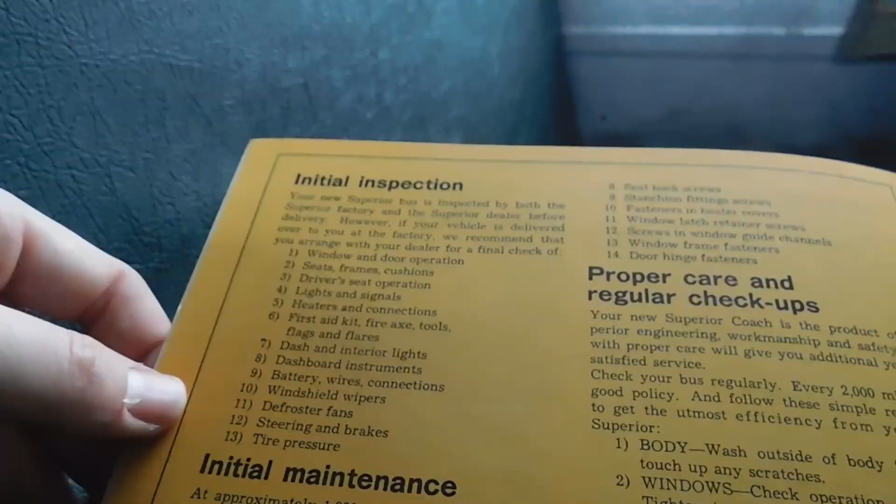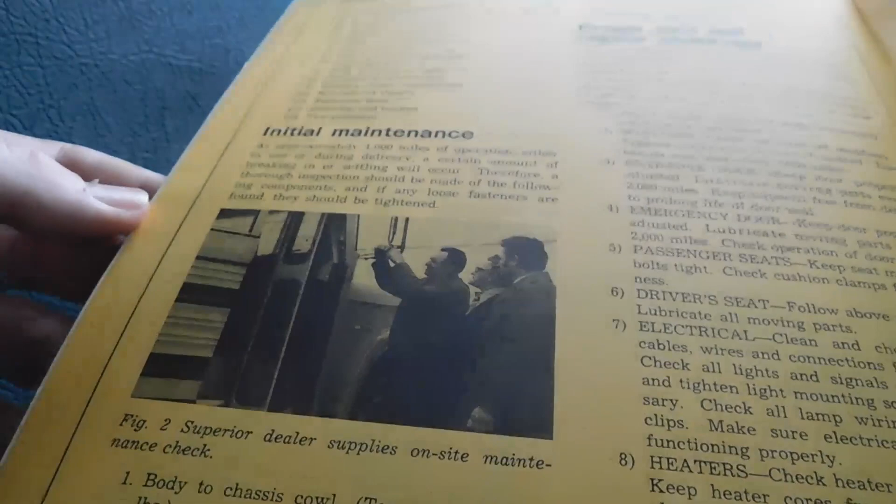So next we've got initial inspection, which would pretty much be your delivery inspection, I guess, and initial maintenance. You got a picture here of the outside of a Superior. The description for that photo is Superior dealer supplies on-site maintenance check. So you got your list on what to check when the bus is delivered. Proper care and regular checkups.

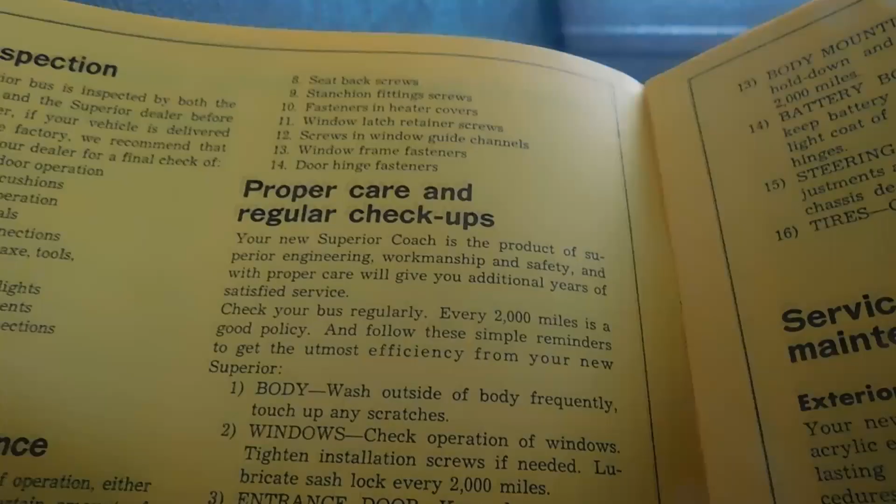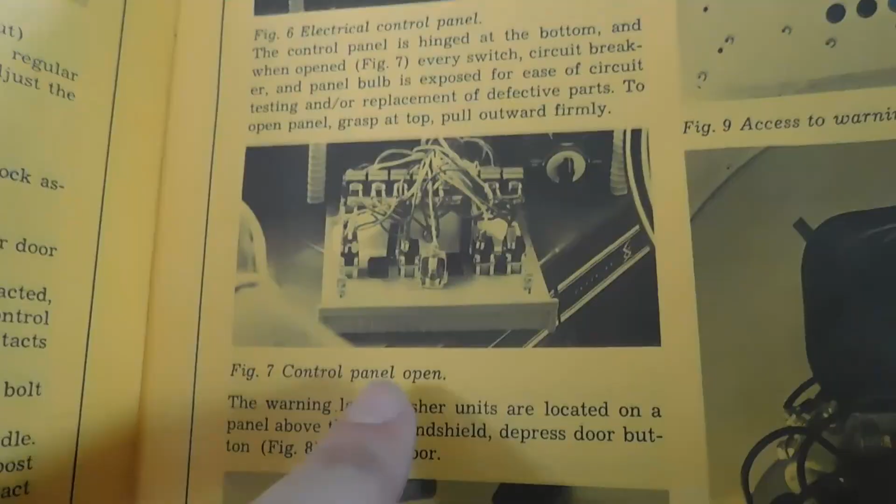Electrical system, you got a picture of the switch panel, and you've got your access to the warning lamp controls right up at the top. There's your switch panel tilted down to access all of the wiring and stuff that's behind it. And then in this picture it shows you where you can open that little door by pushing a button. Warning lamp controls and wiring seem to be behind that door after you push that button.

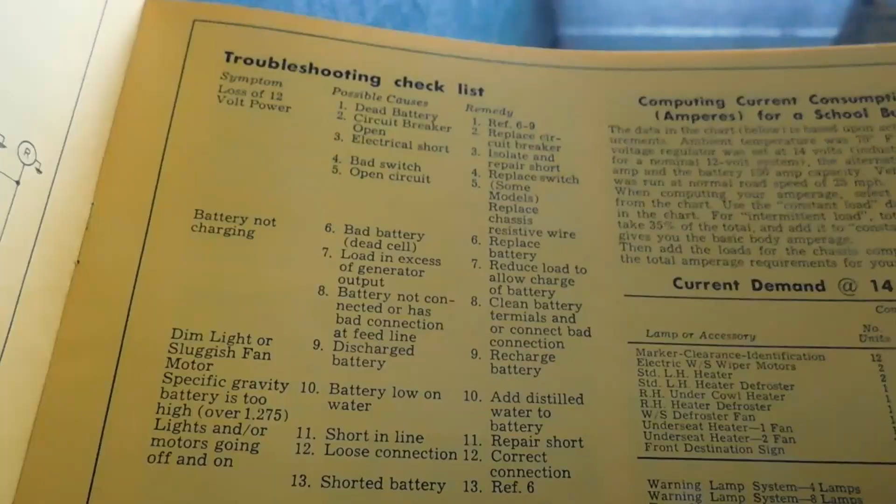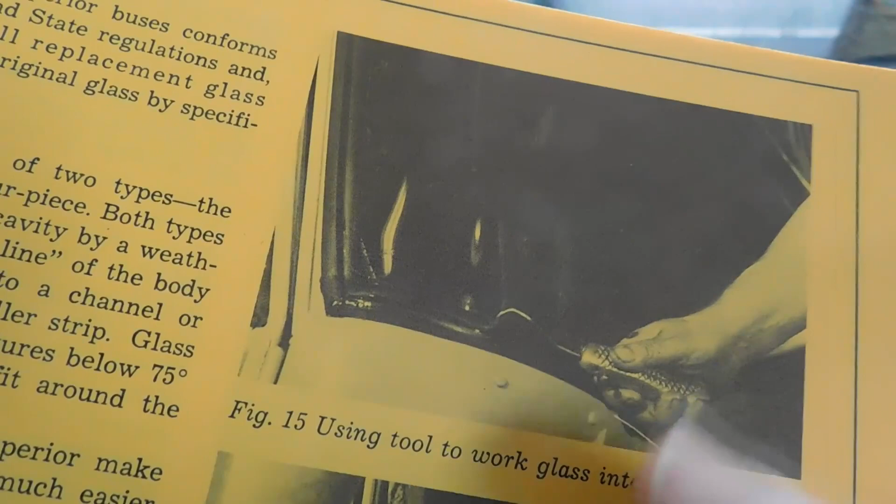Moving on, we've got replacement of glass. So that's just kind of walking you through how to replace the glass. There's your picture of the windshield in the process of replacing it. And then there's the front - you can see they're taking the windshield out. So there's a lot of text behind this.

Which I will say, when I do these, it's more of an overview than it is a word-for-word look at everything. A lot of the reason why I film these reviews is to show the pictures more than anything, because you're not going to find these pictures anywhere else.

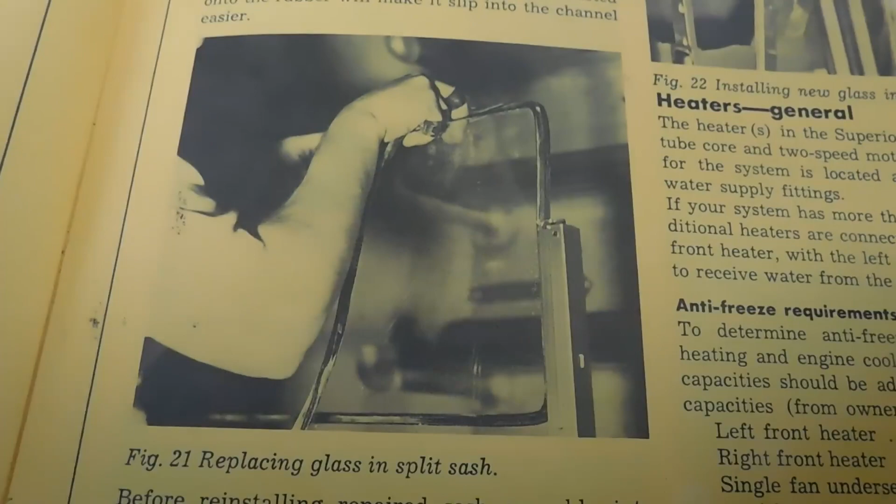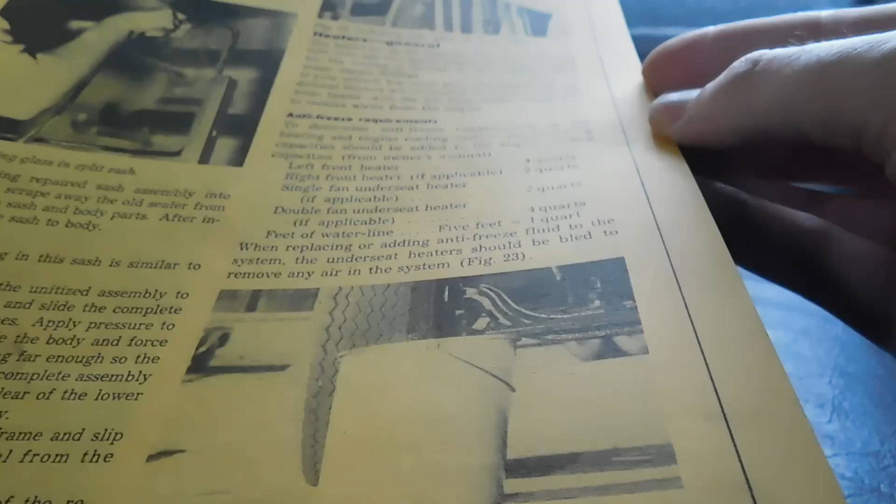Over here we've got a picture of replacing a split sash window. Right there we've got installing new glass in drop sash. And then, bleeding heater system before adding antifreeze. So this goes on to like the heaters and all that kind of stuff. So that's what that picture relates to.

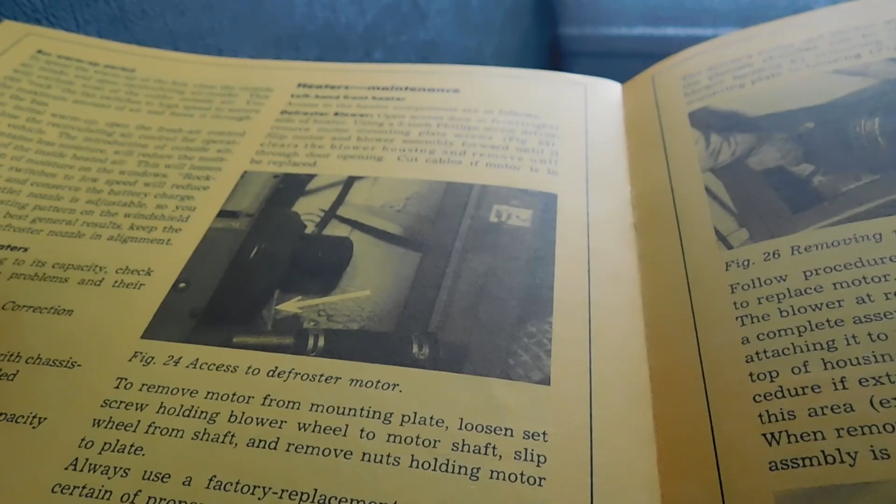And then we've got bus warm-up period, that kind of talks you through warming up the bus. Then it looks like there's a little troubleshooting list there. We got a picture here of access to the defroster motor, because this is under heater maintenance.

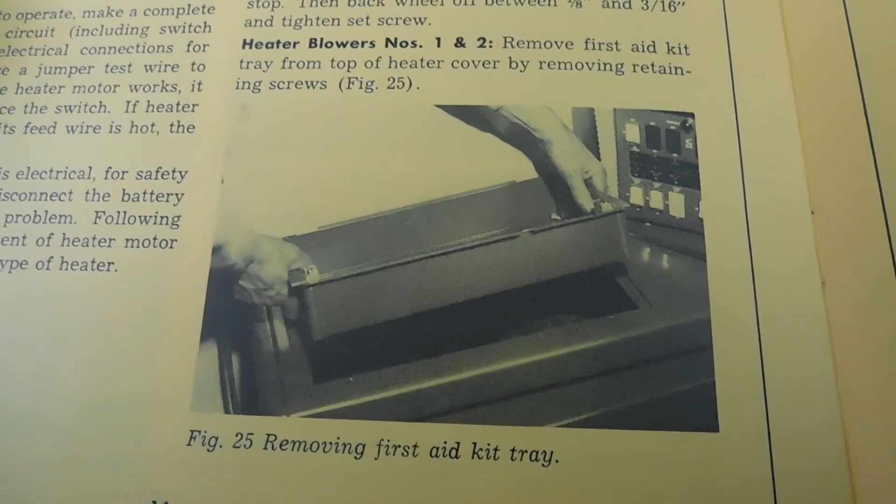And then we've got removing the first aid kit tray, so there's the picture of that. Removing motor and blower assembly. And then we've got removing blower at the rear of heater. And then removing the front heater panel.

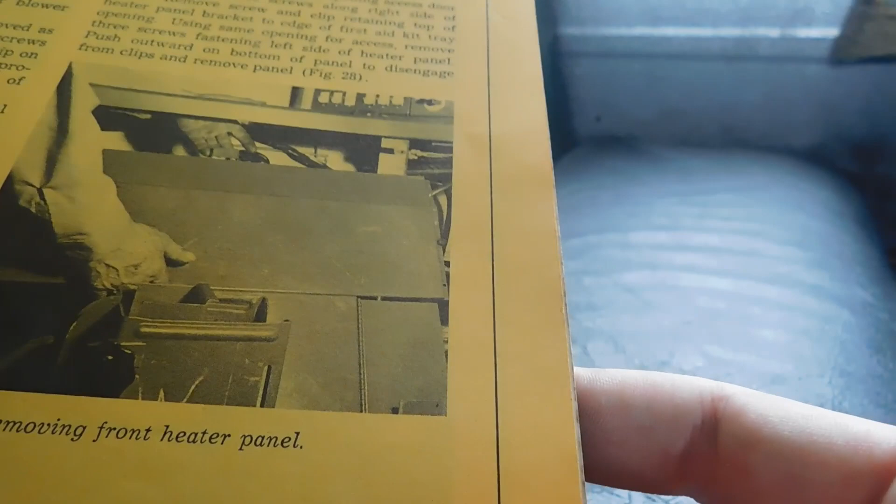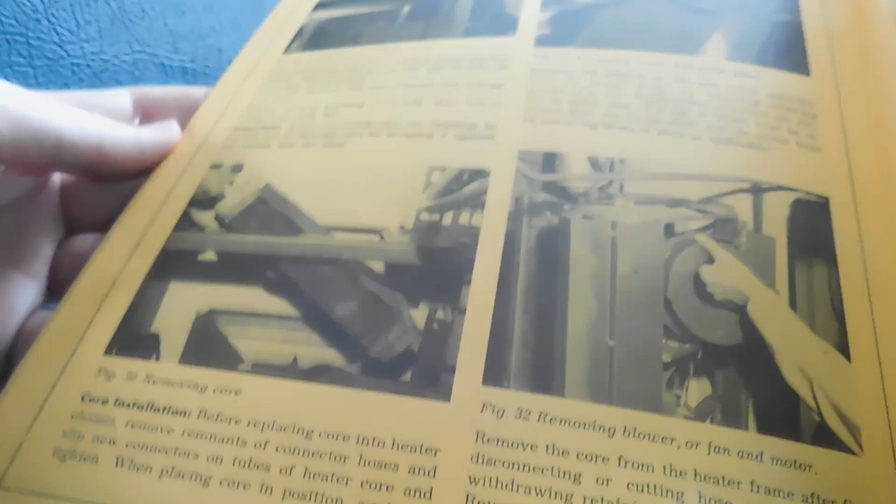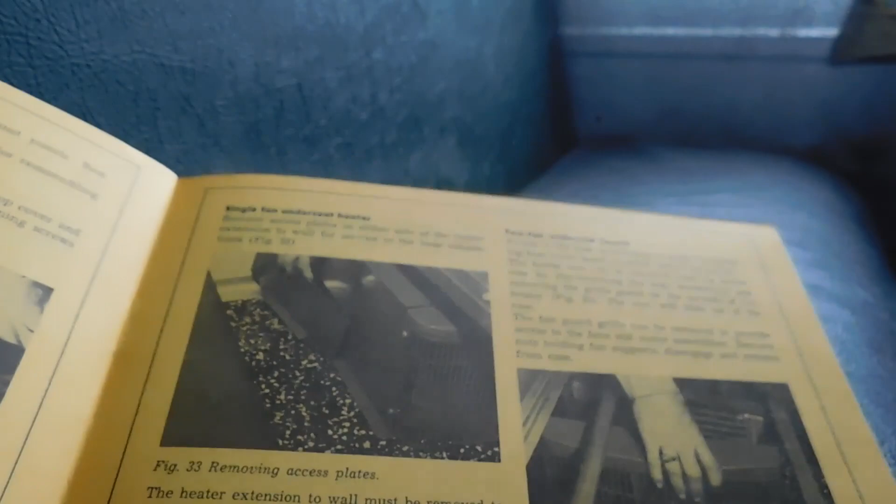And then we've got more heater related pictures here, just showing you different panels to be removed and stuff like that. Removing the core, and then removing the blower or fan and motor. Over here, single fan under seat heater - these are pictures for the under seat heaters, like that's a seat frame right there.

Access to motor fan assembly, so those are just your pictures to show you how to get to the seat heaters. And then windshield wipers, electric.

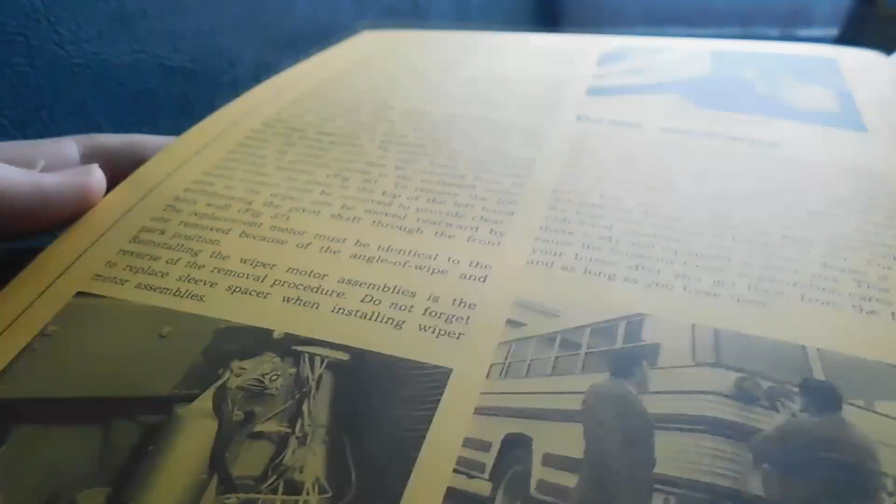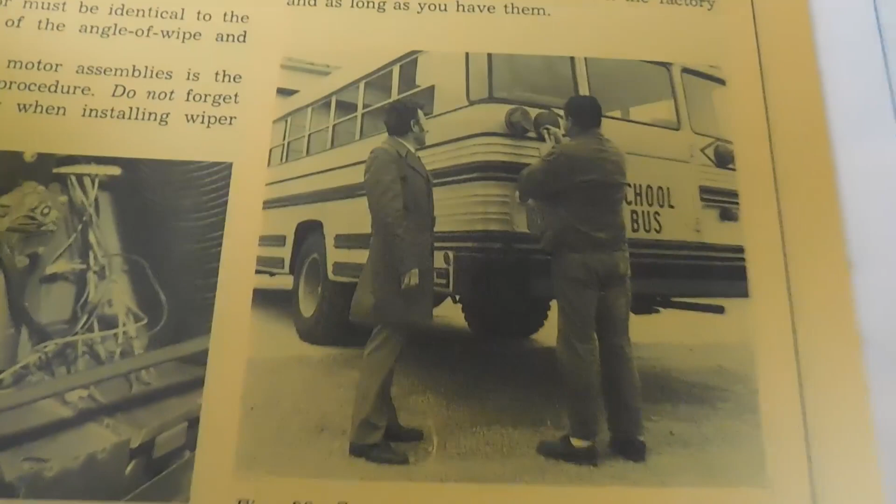This picture is showing you access to the left side wiper, access to the right side wiper motor. And we got a picture right there that says, Superior dealer in typical maintenance situation. So that's just kind of showing you them at the front of the bus, doing a typical maintenance thing.

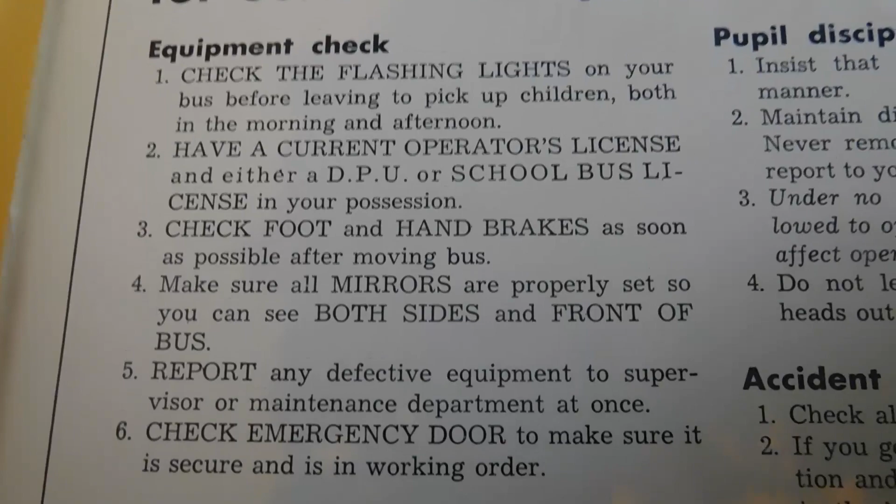So on the front of the back cover, we've got operating and safety guide for school bus operators. You've got equipment check. I'll sit there for a second if you guys want to pause to read it. Let's see, operating rules. You guys can read along if you like.

There's a lot here, sorry. And then we've got pupil discipline. Let's see, accident procedures. And then down at the bottom, you've got your Superior Coach Division logo and the Sheller-Globe Corporation, Lima, Ohio.